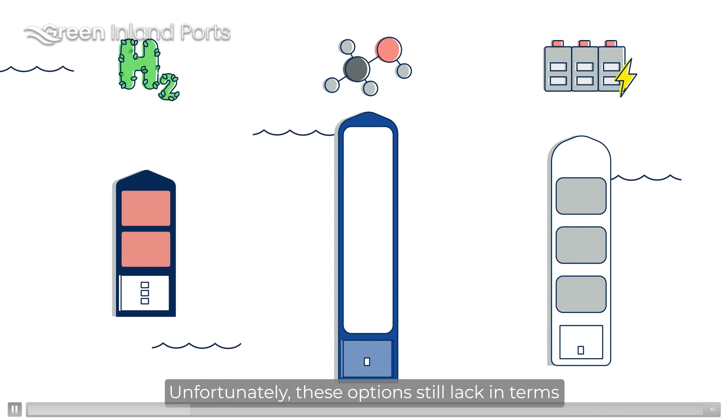The waterborne transport sector faces significant challenges to meet the emission reduction ambitions of the European Green Deal. Synergetics contributes to the sustainability of a large existing fleet of coastal and inland ships, as ships will have to become increasingly clean and use more and more energy with a low or zero carbon intensity. Various solutions are being considered, such as the use of hydrogen, methanol, and swappable battery containers. Unfortunately, these options still lack in terms of costs and practical applicability. Due to the specific navigational routes and diverse types of cargoes they transport, a tailor-made approach is needed to take into account the characteristics of the particular ship and the operation.

To facilitate and accelerate the green transformation of coastal and inland shipping, it is needed to bring together necessary expertise and capabilities. This is where Synergetics will make a difference. The project started in January 2023 and will run until June 2026. Throughout the project, Synergetics expects to have acquired sufficient expertise and skills to provide tailor-made advice to ship owners. Synergetics is made possible by the European Union and is executed by 19 project partners of the following types: research institutes, innovation centers, shipbuilding companies, regulatory authorities, ship owners, and technology suppliers. Due to this unique collaboration, it is possible to accelerate the sustainability of the coastal and inland shipping industry.

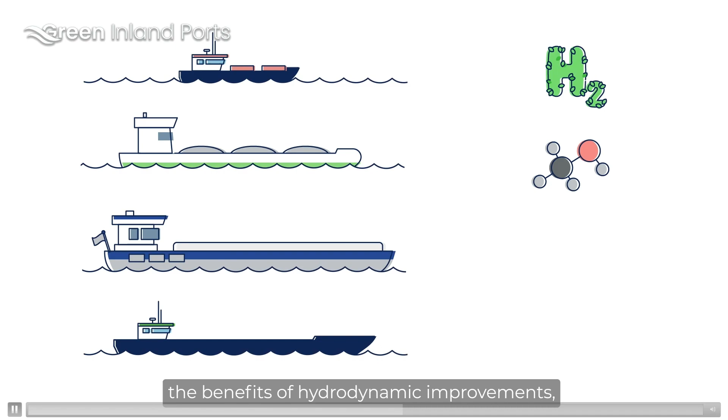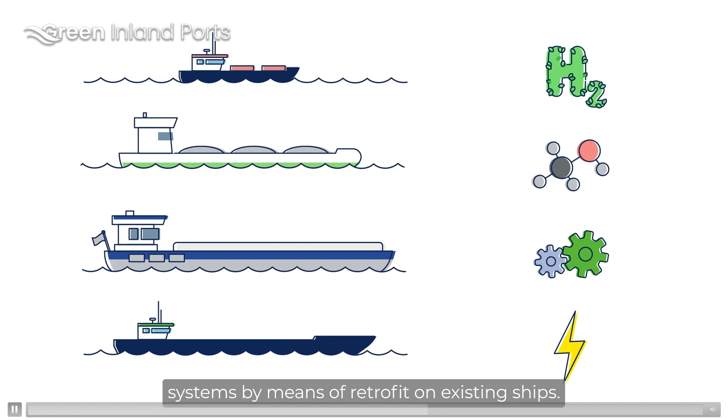Synergetics will demonstrate the use of clean engines running on hydrogen and methanol, the electrification of the main drivetrain, the benefits of hydrodynamic improvements, the use of swappable battery packs, and the improvement of energy management systems by means of retrofit on existing ships. The knowledge how to reduce greenhouse gas and air pollutant emissions is being brought together in Synergetics. The ultimate goals are to create a catalogue of greening solutions, to provide up-to-date scenarios for policymakers, as well as to make available a practical decision support tool and handbook to ship owners for making the right choice for greening of their ships. The project is an innovation action funded by Horizon Europe of the European Union.

The project has a total budget of 7.2 million euro. The European Union contributes 4.2 million euro to the budget. Contributions from the governments of Switzerland and the United Kingdom are also involved. The remaining part is covered by own contributions from the private partners in the project. Synergetics responds to the call, transformation of the existing fleet towards greener operations through retrofitting. It kicked off on the 8th of February 2023 at DST, Development Center for Ship Technology and Transport Systems in Duisburg. An important activity of Synergetics is promotion.

The outcomes will be available to interested parties through different dissemination channels, such as the website, LinkedIn, scientific publications, events, and by means of direct involvement of the stakeholders. Although the most significant developments take place in Western Europe, the outcomes of Synergetics will be disseminated all over Europe, where significant coastal and inland transport exists. Synergetics, creating synergies for green transformation of inland and coastal shipping.

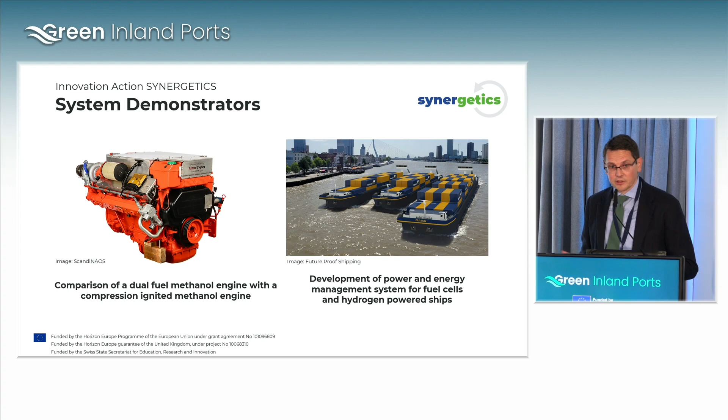And on the other hand, we have Future Proof Shipping, also one of the partners in SYNERGETICS, who is looking into development of the second generation of power management systems for ships which are using hydrogen and fuel cells. They already have the first generation of the systems. They have one vessel, I believe, which is already sailing. The next one is due very soon, and then there will be a third one. And by using the operational data from these vessels, they want to develop a next generation of power management systems. So these are the demonstrators that we are going to deploy throughout SYNERGETICS.

This presentation is called Status and Ambition, so this is the ambition that we were talking about so far. Let's see what's the status, just briefly, because I think I've already stepped over the boundaries.

Robert keeps looking at me.

So I will just quickly go through some of the updates. In this synchronization phase, I think we have one really nice achievement, which is going to be publicly available very soon. We have managed to gather something that we call the pilot database, because people are talking. There are pilots here and there. People are exploring the possibilities, sometimes through their private initiatives, sometimes publicly funded, and so on. But we really don't know what kind of technologies are being tested as pilots. What kind of pilots do we really have? And there was no single database about this. And one of the achievements of SYNERGETICS so far is the pilot database.

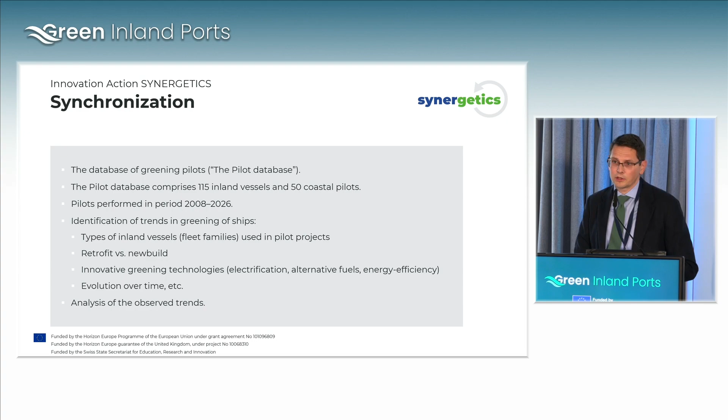We have a database which initially had more than 180 entries. Now we are slimmed down to 115 inland vessels and 50 coastal ships. And it is the most comprehensive and up-to-date database available to our knowledge, and it's going to be publicly available. This is a composition of the types of the vessels. The letters are too small, but it doesn't matter at the moment.

This database is helping us to understand what the trends are. What are the most preferred technologies being used as pilots? What kind of alternative fuels are being used? Are there more electrification or sustainable alternative fuels being used in the pilots? What about the energy efficiency measures? What are the trends with respect to the timeline, and so on?

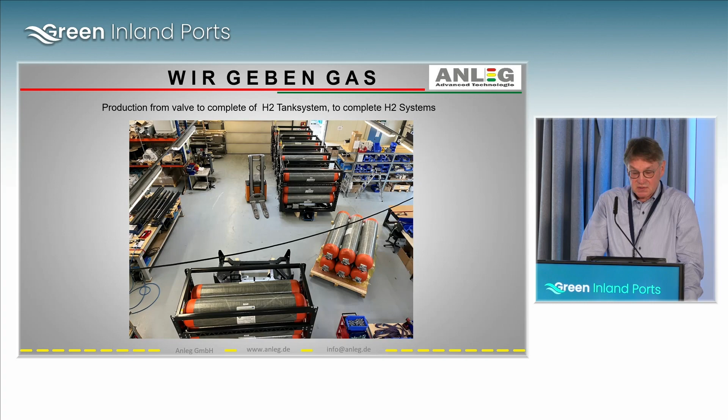So we are transforming all kinds of vehicles. This is for Mercedes. We did the 18-ton just to prove that it's working, and it's not only a one-off. It's one of our rare projects where we not only make prototypes but small series. Next step is 50 units of these 18-ton trucks. As a small company, we are also making refueling stations, because we have an overall approach.

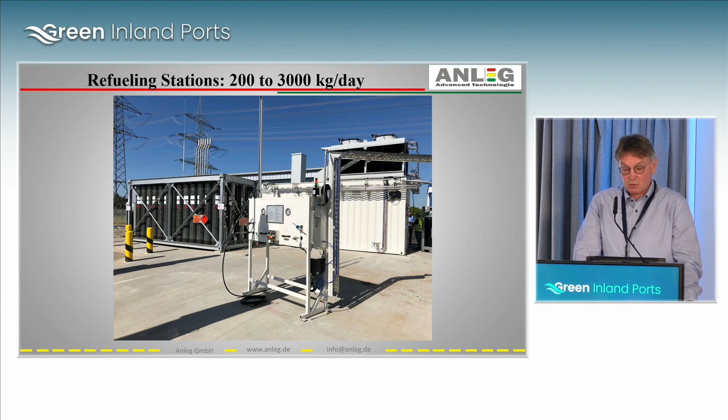The customers are logistics companies. They don't know how a refueling station works, and they for sure don't want to know it, but they need it to refuel their trucks. So we are bringing overall solutions. That means that we make refueling stations. We are also working on electrolyzers, and we have done interesting projects. It has nothing to do with the SYNERGETICS project, but synergy is to use one thing to solve several problems. And the electrolyzer is a very nice example.

We have done a research project with Stadtwerke Kaiserslautern. In Germany, the Stadtwerke own the electricity grid, the wind parks, the water treatment, they run the buses to bring people from A to B, and they run the swimming pools. A swimming pool is an awful hole where you can put a lot of money in, and it will always be too expensive.

So we did a project where we showed that with an electrolyzer, if you use it in an intelligent way, you take green electricity and produce hydrogen. Hydrogen is the byproduct. We produce oxygen to produce ozone for disinfection of the swimming pool. The excess heat of the electrolyzer we use to heat the swimming pool. The rest of the oxygen, not used for ozone production, we use for water treatment, reducing its energy consumption. And then the byproduct, hydrogen, we put into buses.

And suddenly the cost of the hydrogen and the running costs of the hydrogen buses are much lower, because a huge part of the investment of the electrolyzer is used to fill financial holes of other projects. That's quite an interesting approach, which brings us to the consumers of the hydrogen.

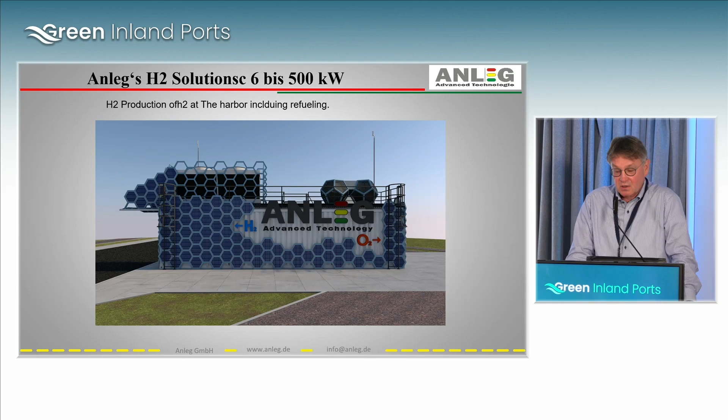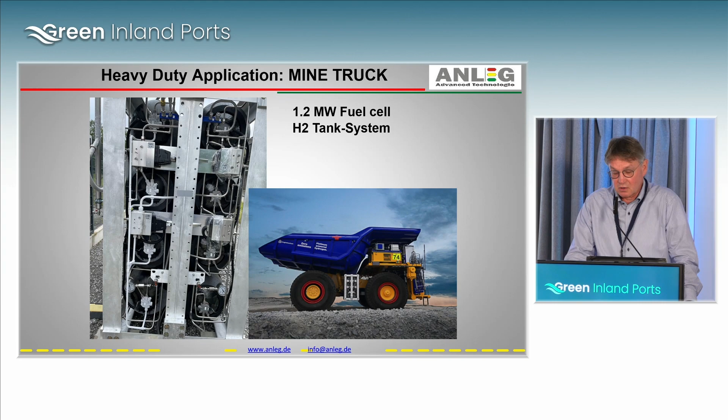We have done interesting projects like a mine truck for South Africa for decarbonized open-air mining, so that's a very ecological thing. It was the first time we implemented 1.2 megawatts into a mobile application. So that was a really interesting project, learning a lot, also about using excess heat to preheat the hydrogen, etc.

And these are all projects we have realized in the last couple of years: a 60-ton truck, a 40-ton Volvo truck, which also ran in Kiruna in low temperature tests. Due to climate change, we didn't have -40, we only had -27, but it fully worked. We have done the MAN trucks, an ICE truck, meaning internal combustion engine truck, and the fuel cell truck. So we can now compare the fuel cell trucks and the ICE truck.

We did the transformation of the battery Crafter because Volkswagen found out that the battery Crafter is not suitable for professional usage, because of 90 kilometers maximum speed. 120 kilometers range; I know from the statistics that no Crafter runs more than 100 kilometers, they are all below. And of course the supplemental weight, if you have a battery Crafter, is not possible.

We transformed it to hydrogen: 127 maximum speed, range is 400 to 450 kilometers at full load. Refueling time 3 minutes, so very easy, but due to a strategic change at Volkswagen, they don't want to produce it anymore because they have a battery strategy, but that's now on the political side.

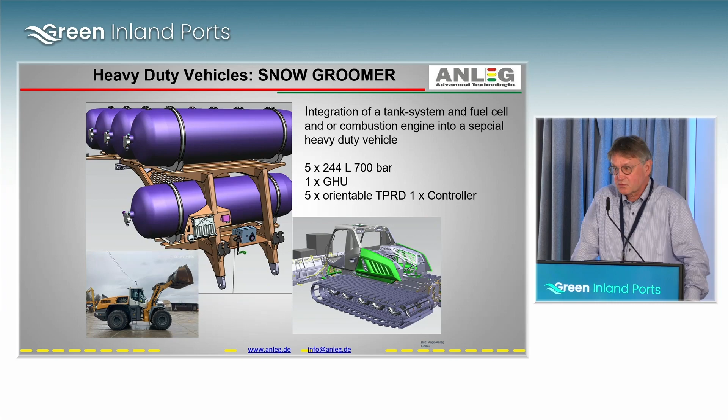And again, 18-ton trucks, which are available, which you can purchase, and we can sell them with the refueling station infrastructure. We also converted a snow groomer, decarbonized skiing in the Dolomites with an Italian company, Prinoth. It's an interesting project for us because then we learn off-road applications. We are also making a refueling station for this snow groomer, so it can be refueled. It's just experience.

And then we come to the next problem. Very often, and especially in harbors, you have vehicles which are not so suitable to go to the refueling station. So we developed, the first one was in 2014, a mobile refueling station. That means that the vehicle is not coming to the refueling station, but the refueling station is coming to the vehicle, allowing me to have several spots where I refuel my consumers.

And this is the one I went to Sweden with to do the first refuelings of the 40-ton trucks and the 60-ton truck from Volvo, and we are currently building a bigger truck for refueling with 500 kilograms for a maritime application in the south of France. So with one truck we can refuel several harbors, which are Nice, Cannes, Monaco, up to Marseille, Toulon, and that's what we're currently building.

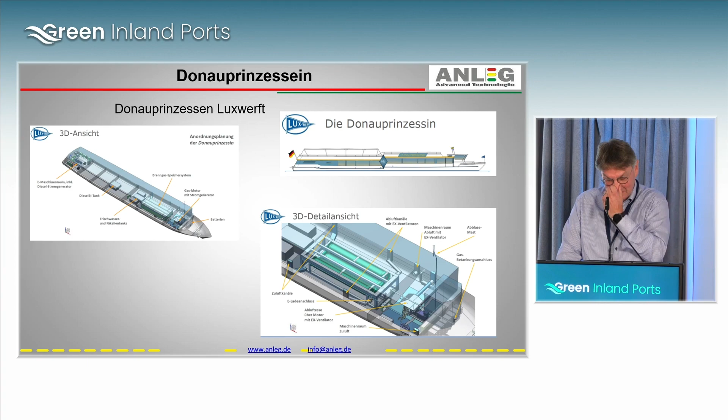That's a Donau project. We are very proud. We are waiting for the fundings, which is something quite usual in Germany. It's the Donau Prinzessin. It's a passenger boat similar to what we used yesterday, and we passed through the certification. So now we are waiting for the funding to realize this project.

One of my first push boats was the Elektra push boat, which is running in Berlin with a 300 kilowatt fuel cell system, battery pack, and hydrogen. That's where I first had the idea to develop so-called H2 tank containers or cartridges. That means that I bring the bunkering process away from the harbor to the inland, and I just have logistics.

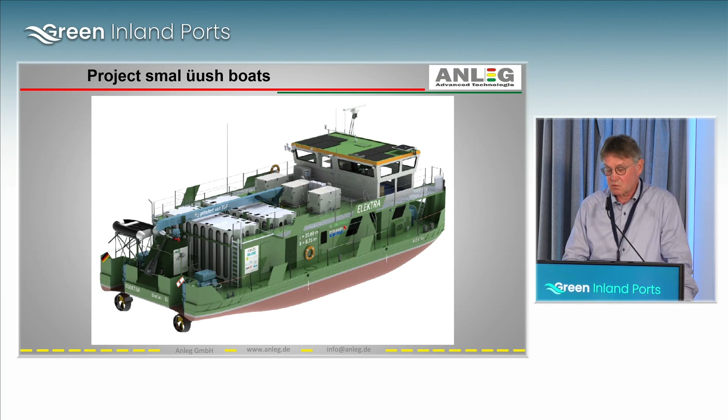And containers, as you see when you look out of the windows, are something used in ports. So I don't need a refueling station at the harbor. I don't have a bunkering process. I just swap containers, which is quite easy, quite quick, and works quite fine. So we implemented it and showed that it works on the Elektra push boat.

We have the hydrogen boat for the harbor passenger taxi boats ready. We're just waiting for hydrogen infrastructure to transform these boats with a similar principle to fuel cell. For regulation, you need, of course, two systems, so if one shuts down, you can run the other one. And hydrogen supply. I'm just showing you examples which are possible today. We can start with this kind of boats. We can start offshore working ships for offshore wind park platforms.

We passed through DNV and CESNI, and that's interesting for me: as an engineering company which wants to produce things, we suddenly became specialists in certification, regulations and normalization. So we are also mandated by a few Rhine shippers to work together with the DST to work out regulations, or how hydrogen systems could be implemented on different kinds of ships, meaning cargo, container, gas carrier. Where can I place the hydrogen system so that it gets classified and certified by regulations?

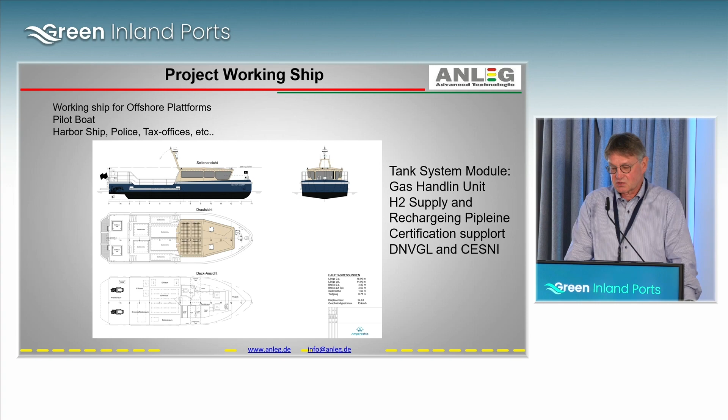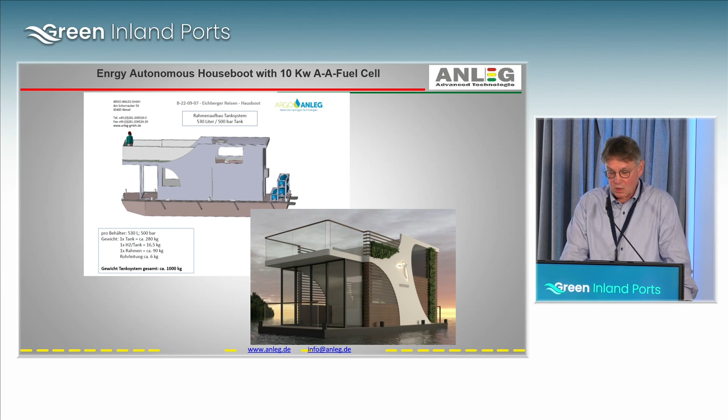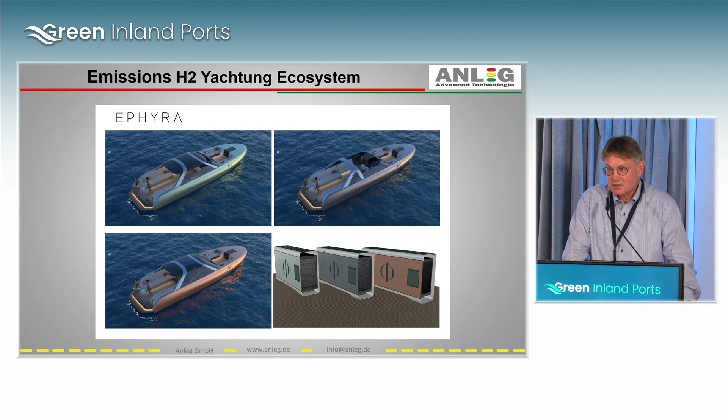Other applications like houseboats, a very interesting project. It's more a demonstrator, but decarbonized tourism is coming more and more. And we also have luxury leisure boats. You know, more and more people want to have nice fun with a boat. A 40-foot full carbon boat, high speed with a hydrogen system, with an ecosystem, so the hydrogen is produced on site, and during the night the boats are refueled.

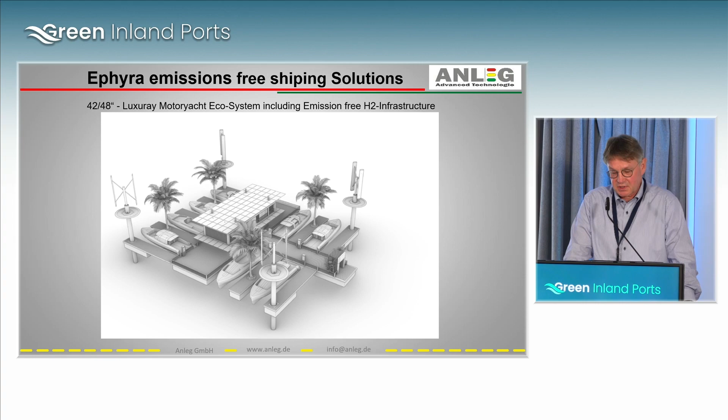In Mediterranean regions, 80% or 90% of the boats always sleep at the same harbor, so you only need one infrastructure to refuel these boats. We built one 2 years ago, and we are now building 4 for the Olympic Games in Paris. A 90-foot catamaran, also for passenger transportation, we are currently realizing. And now, coming to what interests you more, we are currently building the Rhenus Mannheim with 800 kilowatts of fuel cell.

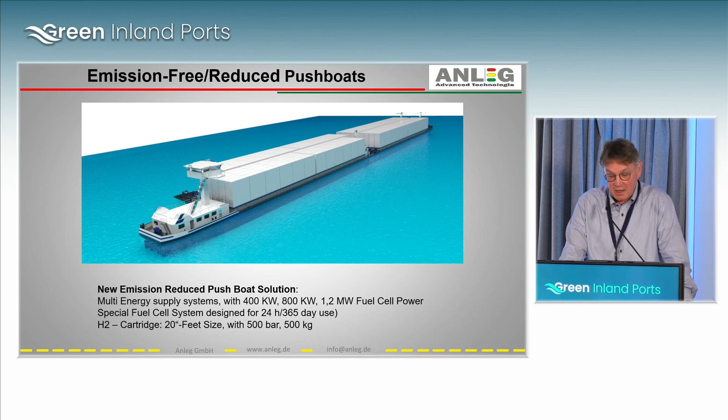And here we applied the same system. Oh no, it's on the next slide, sorry, this is the hydrogen supply. To make it easy, we made 20-foot containers, which can be swapped off the vessel. And the fuel cells are in this open space compartment. That's because of regulations; that makes life easier. And this ship will start to sail in January.

So today it is possible to transform these ships. And we are currently planning the next ship, which will run end of '24, beginning of '25. It's a 1.2 megawatt container push boat, which will also run on the Rhine between Rotterdam and Duisburg. And that's our specialty. We do the full package, from the hydrogen tanktainer to the gas system to the implementation of the fuel cells, everything from one hand. And on this project, we also look at the hydrogen supply.

And that's now the interesting point: if you have this kind of user, the push boat Rhenus Mannheim will need approximately 2 tons of hydrogen every 100 hours. So with the tanktainer, which I have to bring to the harbor, I have a big consumer of hydrogen. So with the investment in an electrolyzer, you are not investing in a small one, you invest in a big one. So the economy of scale is there.

And we can produce hydrogen today, purchasing the electricity at 10 cents per kilowatt-hour, which is still quite expensive. We can produce hydrogen for €6.50. €6.50 corresponds to the energy costs of running the ship with diesel. So if we are at €6.50 today, we can run a fuel cell ship cheaper, and we can also run an 80-ton truck cheaper on hydrogen than on diesel. And now that's the interesting point. So the economics works today.

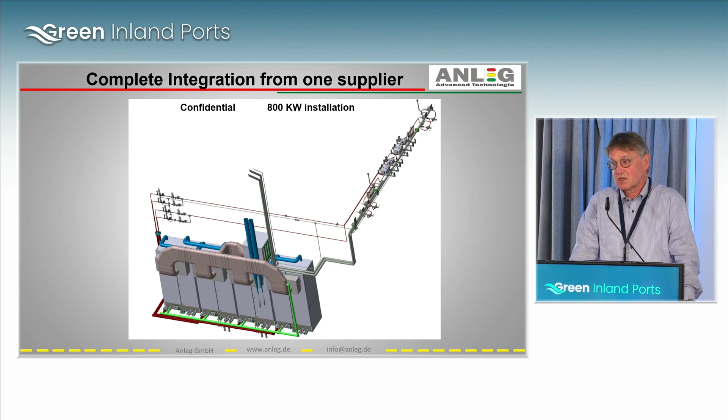That's very, very important. And now, for the hydrogen tanktainer we designed for the ships, there's another business case, because the ship is on the water 100 or 120 hours between Rotterdam and Duisburg, as an example. So it needs a minimum of 2 sets of tanktainers, because one set is on the ship and one is on land at the refueling station being refueled. The refueling time is 2 or 3 hours, so that's nothing.

And with this tanktainer at the harbor, I can build up a very cheap refueling infrastructure for the vehicles or applications I'm using at the harbor. While the ship is sailing from one point to the other, I use this hydrogen supply system for the ships to refuel my trucks, my forklifts, my electrical generators, or whatever else. And when the ship is coming, then I organize, and that's only logistics, and harbors can do that.

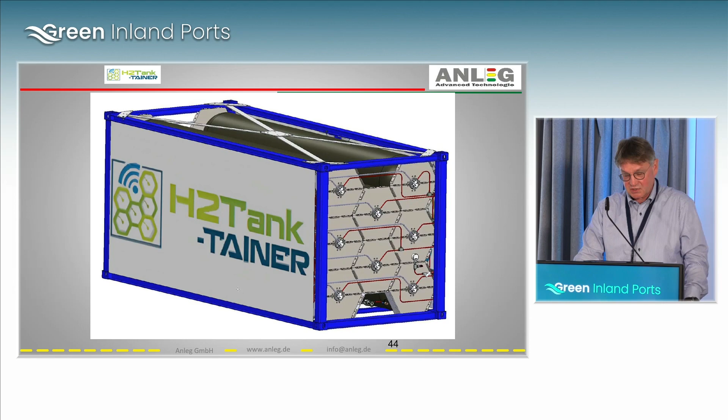I organize a full set at the quayside, put it on the ship, take the empty one, bring it back to the refueling station, and then here we go again. And then I also share the investment of one expensive tanktainer by using it for several applications. Here I have the example of a low-cost dispenser where I don't need compressors.

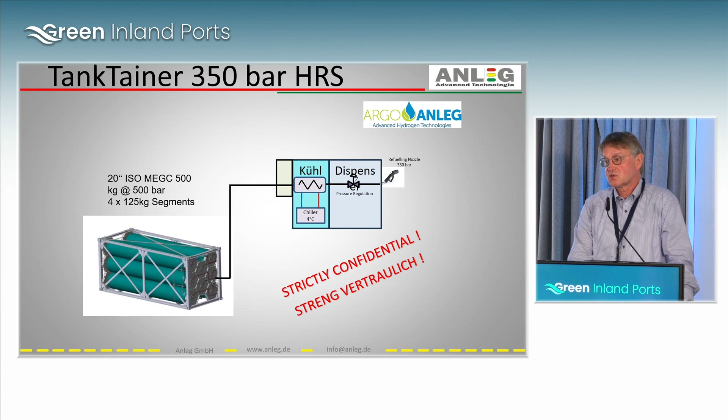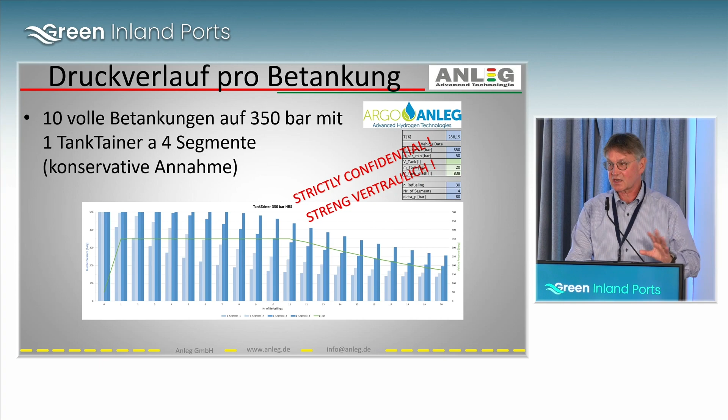Depending on the pressure rate, I eventually need a chiller, but I can make a very cheap infrastructure for refueling different applications. And I just calculated an example: I can refuel 10 vehicles at 350 bars using all the 4 segments. That's technical details now. So it's technically absolutely feasible and makeable.

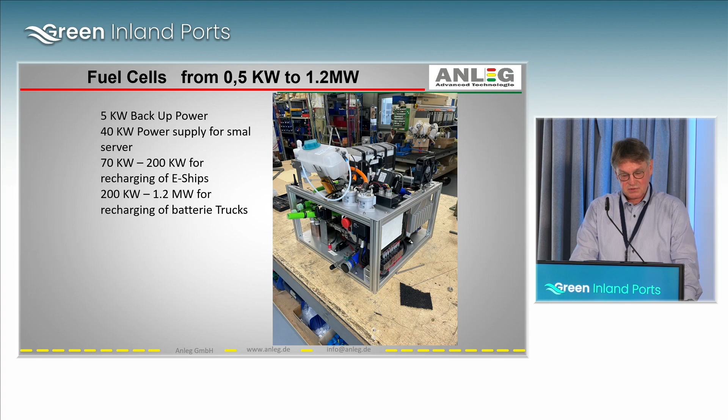And now for harbor applications, we also make hydrogen generators, electrical generators, for example, for recharging ships during the night or supplying the electricity of the ships during the night. So that's fuel cell systems, and I just made it in time.

Questions? I think we leave the questions for the end because we need to run a little bit. Thank you very much.

I think we've seen quite a lot here. One of the synergies that we wanted to establish is to learn from the other industries, because shipping is an ancient industry, and it's also very inertial, so to say, and other industries are very often more advanced, and this is what we can learn from them. But there is more to this, and I hope we will have some time for the discussion.

Our next technology in line is methanol. Bengt from ScandiNAOS is a pioneer. He's actually the first person that I have heard talking about methanol on ships. Maybe it's me, but okay. Bengt, please. The floor is yours.

Right. Speed up. So, yes, good morning. And thank you, Igor, for the introduction. I will try to do this as fast as I can.

My name is Bengt Ramne. I'm managing director of ScandiNAOS AB. We are originally a naval architectural company based in Gothenburg, Sweden, but we have some presence on the continent as well, with ship and boat design in Trieste, Barcelona and Split. We were established in 2005.

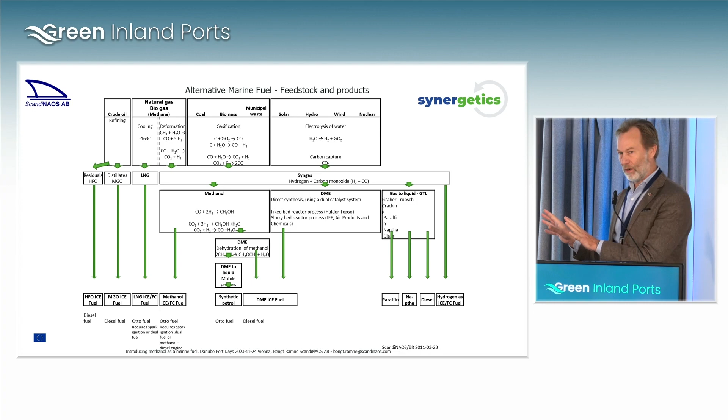So we did an extensive mapping of what fuels were available, starting with the existing fuels based on oil. In 2009, when this happened, everyone was pushing LNG. We thought gas was good, but it has a problem on ships, so we were looking for other ways. We don't have to go through this, but this analysis ended up with methanol. We thought that methanol is a good thing to look for.

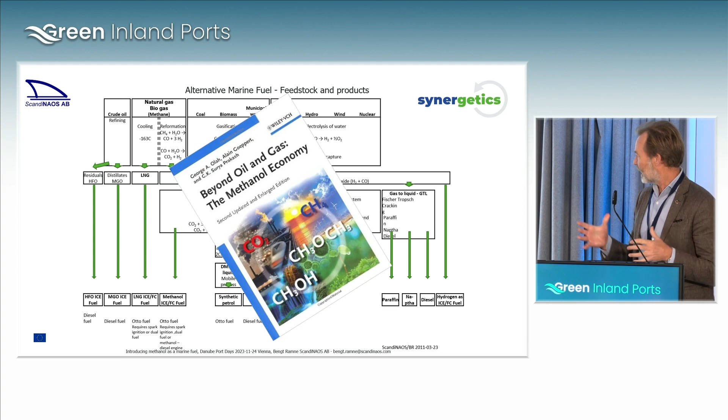We were not the first one. Some great minds had already considered methanol as an alternative fuel to oil. George Olah is a Nobel Prize winner. We got some inspiration, and we took his thoughts.

Why methanol then? It's a clean burning alcohol with no sulfur and low emissions of particulates and nitrogen oxides. It has a good potential for being produced from renewable feedstock. It's biodegradable and does not bioaccumulate in the aquatic environment. It's a liquid, which is important when you need to carry a lot of energy. And it's easy to transport. It's liquid in normal conditions. Those are important things for us.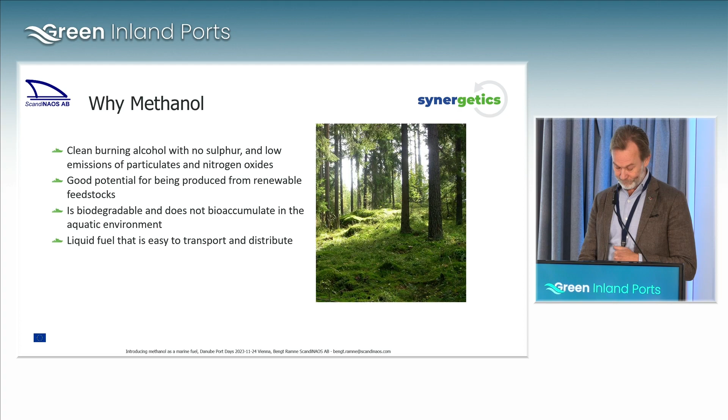Again, this EffShip project was the ground zero. We did this project together with Stena, Wärtsilä, SSPA, and a number of other companies. We pitched the idea, we identified the benefit of methanol, and we got Stena to consider it a good idea. So we got them to support a number of pilot projects.

The first was Stena Scanrail, and after that we did the Stena Germanica conversion, where we converted the second largest Ropax vessel in the world to methanol. Four Wärtsilä engines were converted to methanol. We were acting as the naval architects and system integrators, so we did everything except the engines, which were done by Wärtsilä. But we developed the design and all the systems around it.

About the same time, the Mari Jone was also built. That's a product tanker with a 2-stroke engine delivered by MAN. So at that time, things were really happening. We were really getting going with methanol, at least in seagoing shipping.

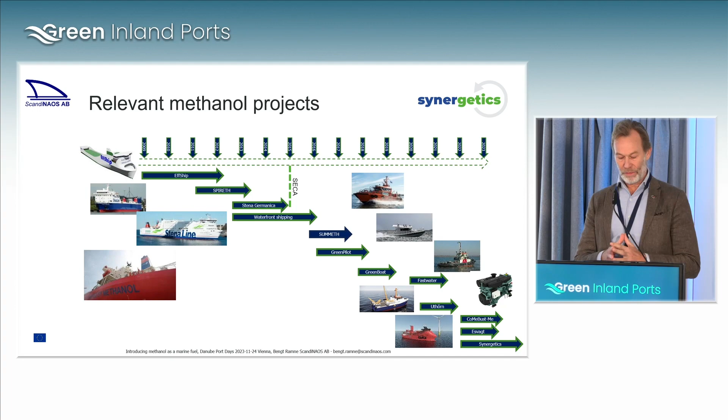Then, as a challenge as a naval architect, when you introduce something new on a ship, you have to convince everyone you take care of the risks. One concern with methanol, it's a low flash point fuel. It's 11 degrees, and typically for ship fuels, it has to be 60 degrees in order to fit into the regulations, which meant that there are some considerations you have to do, and of course, you have also to prove that what you're doing is right.

At the time, when we started this, there were no rules for methanol, which someone thought was a problem. We thought it was a benefit, because then, well, we set the rules, but you always have to convince clients, authorities, and class that you're doing safe things.

So apart from the low flash point, there are some other concerns. Methanol, when it burns, it's clean burning, which is good, but it's so clean burning you don't actually see it when it burns. So you have to be aware of that, so you have to have other ways to detect if you have a fire. And there are different ways to approach fire suppression. It burns in a different way. It's not always a worse way, but you have to just be aware of the situation.

And then we have the issue with material compatibility. It's corrosive for some materials, and for polymers like gaskets, sealings, what works with diesel might not work with alcohol. But that's just general engineering work to do. You have to go through it.

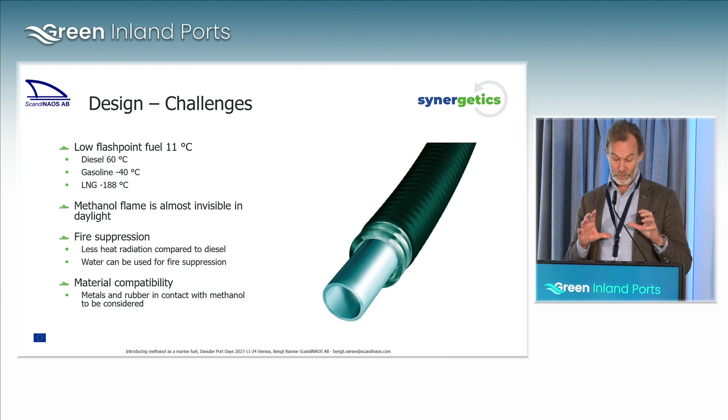So that was things taken care of, and that's then the Stena Germanica, where we then adopted this new knowledge we had. And changing from diesel to methanol, you can make it very complicated, it becomes very expensive. But if you do it carefully and you really identify the risk and try to be clever, it's not that big deal. You can actually make a conversion of a ship within reasonable cost, and particularly much cheaper than any other alternative fuels. Stena Germanica, 4-stroke engines delivered by Wärtsilä for the big ships. Mari Jone, 2-stroke engine delivered by MAN.

So with those 2 projects, we have got the ships, we have got the methanol on to the marine market. And that was somewhere between 2013-14. So it's not a new thing. It's pretty well established, even though we haven't really seen the big boom yet. But there is no excuse for anyone to say that technology is not there. We have a system, we have the methanol.

Anyway, we were moving on from there. We said, well, now this is done. Let's look for the smaller applications. So we got a project together with Swedish Maritime Administration, where we got to equip this pilot boat with a methanol engine. And we were assuming that we would do the same thing as we did before, naval architects, system integration. And we asked Volvo, Scania about the methanol engine, because we said, you must jump on this opportunity. But there is no real drive from the big engine manufacturers to do anything different.

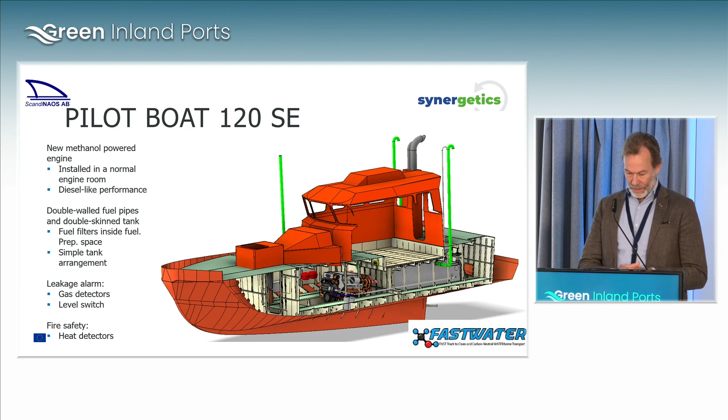But we realize we can do it for the Scania type engine. We can make this compression ignited. It's good. I think that's the best engine we can see, but it's limited. So now we are looking to broaden the offer. So then we see that we have to approach a larger market, and that's why we now have introduced this

dual fuel system. And all engine suppliers, they will say that they will have dual fuel systems in 2027, 2028, and they will have it for their particular engine. We say we will have a dual fuel system operating in 2024, and it's a generic system that you can apply to pretty much any engine. And that sort of stirs up some activities and makes OEM engine suppliers a bit nervous, which is, I think, good.

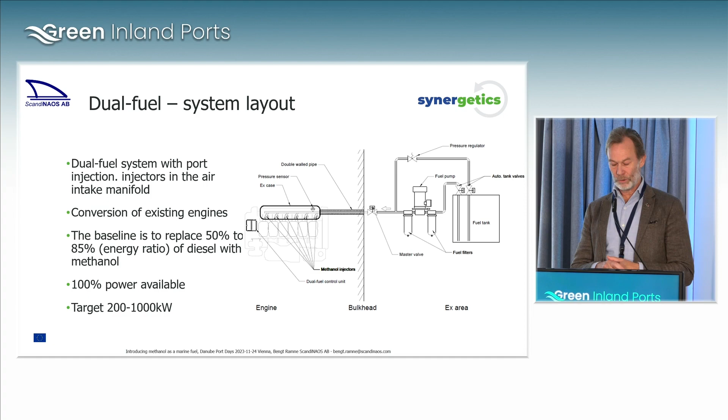A dual fuel system, we maintain the original diesel system. We add a methanol fuel tank, a pump, a filter, some valves, and then to the air inlet manifold, we add methanol injectors, and then we add our control system. This is now being adopted onto Volvo Penta engines and will be fitted into a pilot boat by the end of this year, and then this will be tested for the Volvo Penta.

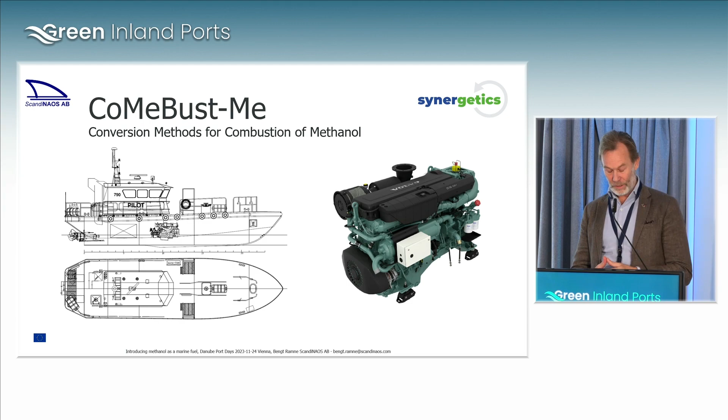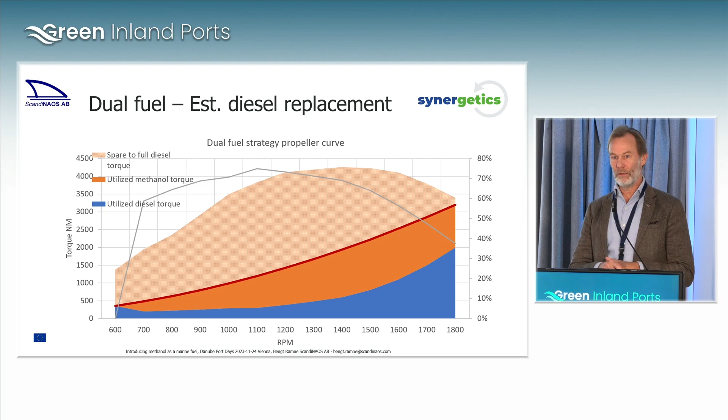But the important thing here is that we find a way to convert existing engines. So if you have a Cummins, an MTU, or an MAN engine, we can convert that engine to methanol, which means that all existing fleets are now a target for our conversions. Anyway, in the SYNERGETICS project, we will have two engines. We will compare the compression ignited toe-to-toe with a dual fuel. So we will see how it performs, cost of the engine conversion, fuel efficiency, emission, etc.

And of course, the objective is to find how to convert the existing fleets, or replace existing engines, in the most cost-efficient way. For new building, or where you need to re-engine, and within the engine power range, we would say that the compression ignited engine is preferred, but for any other engines, the dual fuel concept is what we think is good. So this is the engine for the SYNERGETICS project,

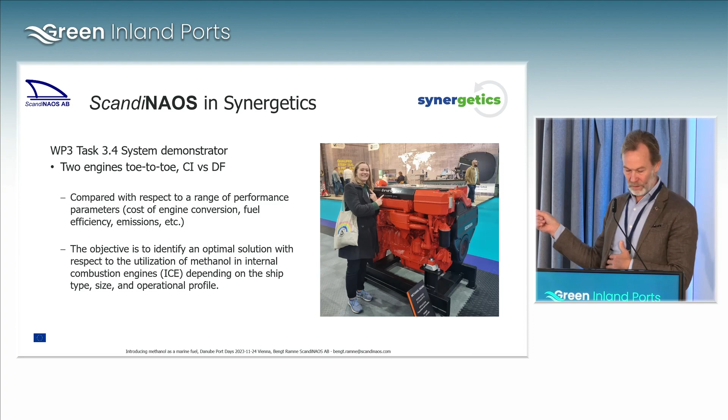and we are operating two entities: ScandiNAOS design and development, and then we have Enmar Engines, which is our engine entity that delivers engines. Enmar stands for Environmental Marine Engines, and you can understand how surprised I got when I realized Enmar is Ramne read backwards.

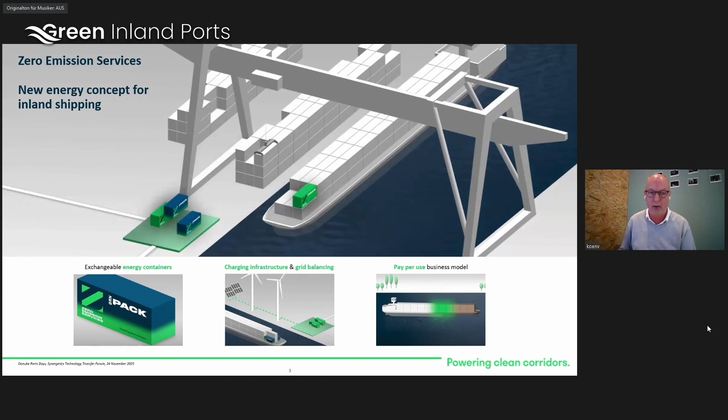And the current ship is called the Alphenaar, and it's a relatively small ship, 90 meters, with about 100 TEU on board, shipping daily from a small town called Alphen aan den Rijn to Moerdijk, one of our large coastal and inland shipping ports. So back and forth every day, which is about 60 kilometers, so 120 kilometers. And with one battery container, you can do this 60 kilometers.

Currently there's only a docking station in Alphen aan den Rijn, so you need 2 battery containers aboard to go back and forth. If there is a docking station in the other part, and we are in the process of achieving that, then you swap one of these ZESpacks, one of these modular energy containers, and that's basically the system.

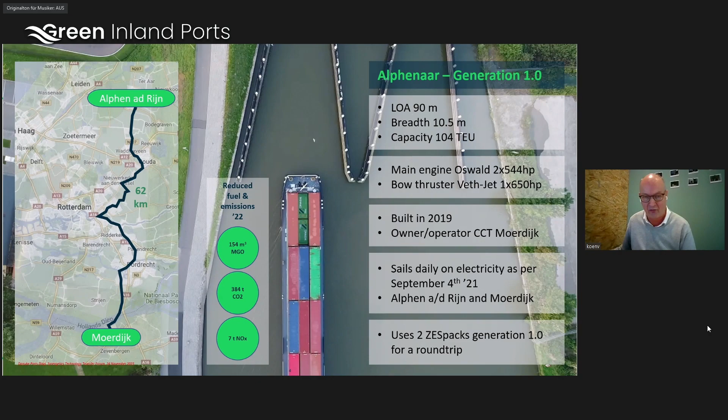Here's some pictures. A docking station has a very small spatial footprint, about 15 by 20 meters. This is one of the containers, which is a 20 foot. This is the port of Alphen, the small port near the huge brewery of Heineken. So most of these containers are filled with beer at the moment. And this is the ship called the Alphenaar. And this is also kind of the rivers where it's going through.

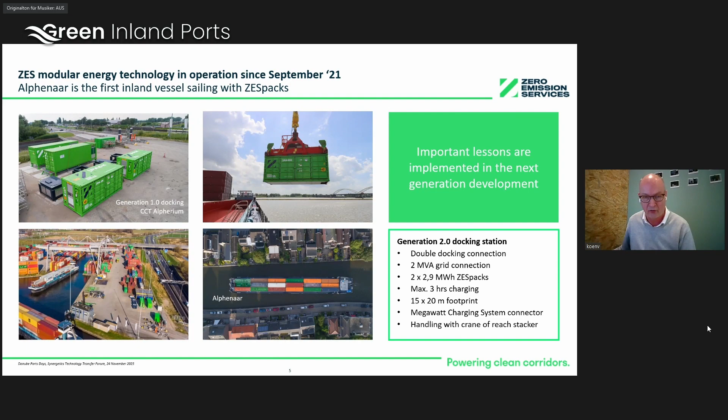And one of the huge advantages is also the lack of noise. You can imagine that these people are quite happy that this ship is now almost silently crossing the waters. There are some learnings which will be part of SYNERGETICS. And we see a lot of adjacent models where you can improve this system.

If you have a direct line to docking stations from a nearby distribution center, of which there are a lot in Holland, probably also in Austria, you can use the solar cells to load the batteries as well. So you have a direct line, and you don't have to buy green electricity. Shore power might be, we are looking for a flexible shore power solution using containers for that.

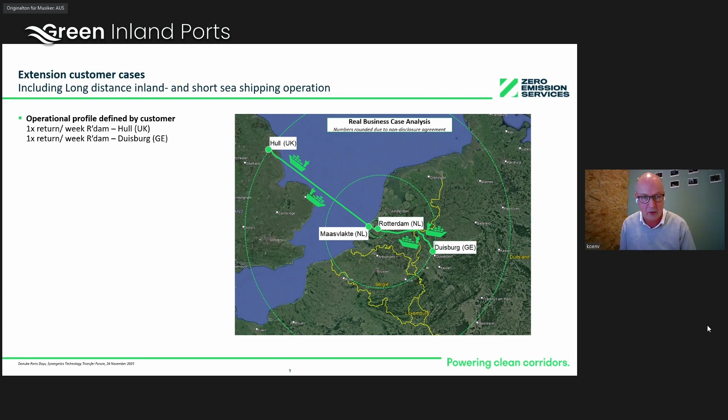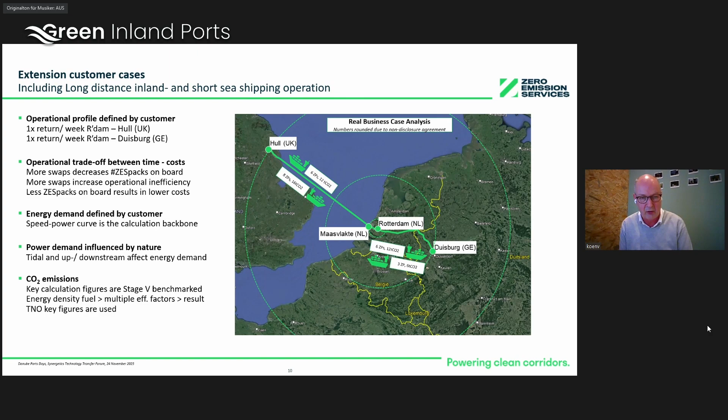So we are now actively involved with a shipment from an inland port in Holland called Nijmegen via Rotterdam to Hull, back and forth. And we are looking for solutions along the Rhine to Duisburg or Wesel. It's always an operational trade-off between time and costs, as you can imagine. We really need to look into every case in detail, what exactly the energy demand is, and of course what the power demand is at certain locations.

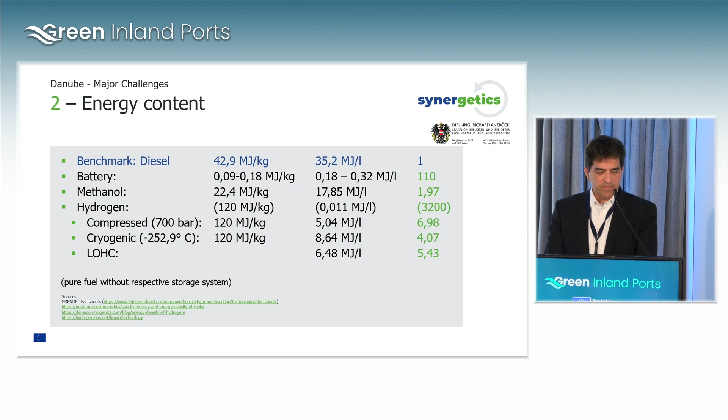If you look at the infrastructure, you have the Rhine. It's densely populated, a highly industrialized area along the entire river. You have a lot of chemical industries along the Rhine, which make the availability of alternative fuels quite probable, and also the reliability of this availability, even, as we heard, as byproducts of something you are doing anyway. Short distances between bunkering stations are possible. On the Danube, in comparison, there is a lot of space in between. You have hardly any chemical industry along the river, so hardly any synergies. Anyway, you need sufficiently narrow spacing of bunkering stations, which would be difficult to achieve along the Danube.

A general consideration is that a transition from a single fuel environment, diesel, to a multi-fuel environment, methanol, hydrogen, batteries, requires a multiplication of bunkering and storage facilities. So there is, as we already heard, not a one-size-fits-all solution.

For the costs, I have just gathered some anecdotal evidence. Batteries for long-distance transport, evidently there is currently no use case. It's just for illustration. In order to replace the average bunkering capacity of a typical Danube pusher, which is about 60 tons of diesel fuel, you would need batteries with a weight of about 1,500 tons. And according to current key information, a total volume of 750 cubic meters, which is about one barge,

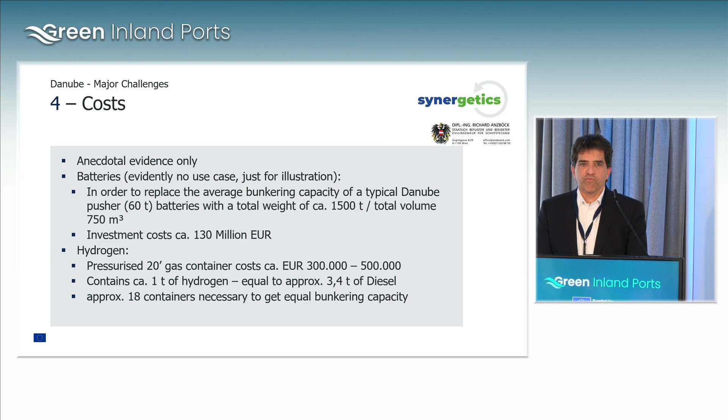and an investment cost of about 130 million euro. For hydrogen, if you go for pressurized 20-foot gas containers, the costs, perhaps Jan will correct me here, is about 300 to 500,000 euros. It contains about 1 ton of hydrogen, which is equal to approximately 3.4 tons of diesel. So to get the same bunkering capacity, you would need approximately 18 containers. So what I want to say with that is, if you go for these alternatives, you really need a very dense spacing of bunkering or swapping facilities for these containers.

What could we do? Batteries, probably suitable for local passenger traffic, day cruises, where you also have an influence on the available infrastructure. Methanol, hydrogen is first of all a hen and egg problem with regard to the infrastructure, because ship owners will not invest as long as there is no sufficient bunkering infrastructure, and bunkering companies will not invest as long as there are not enough vessels using alternative fuels. So again, if you're a shipping company that has a certain influence on the infrastructure, it might be a viable alternative. So if you can set up your own bunkering infrastructure because you have a point-to-point relation, it might be possible.

Then there are further challenges. We have heard from, in particular, Jan and Bengt, many of these challenges. There are already solutions. There are approaches to mitigate the potential dangers. For example, methanol is toxic. It mixes with water, can be a hazard to persons and the environment. Hydrogen, for example, in its cryogenic form is extremely cold. It's close to absolute zero. So it could be, in case of inadvertent spillage, a hazard to the structural integrity of the vessel in case of spontaneous embrittlement. And of course, we have the issue of crew qualification. You need highly qualified crew to appropriately use these alternative fuels.

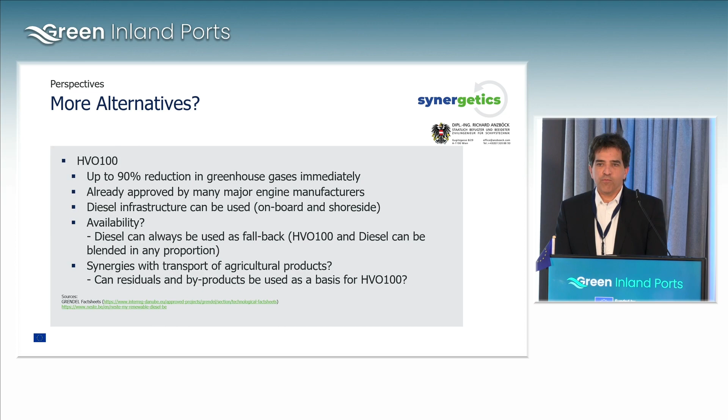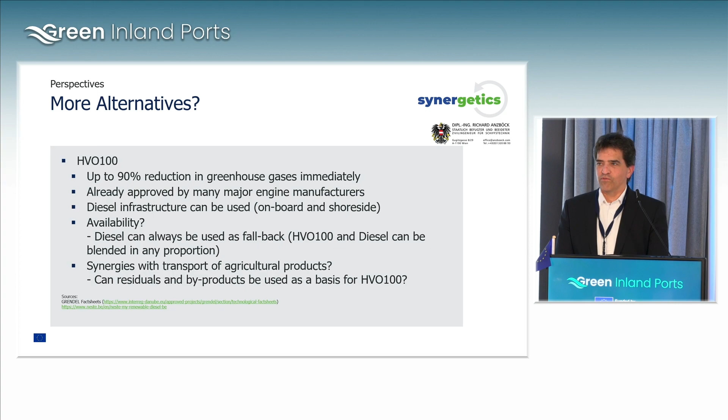Could there perhaps also be synergies with the transport of agricultural products, which is quite some commodity on the Danube? Can residuals and byproducts be used as a basis for HVO100 and create their own business case in that respect? So you see there are still lots of challenges for the use of alternative fuels. I'm, as I said, as an engineer, very enthusiastic about all those technological developments. But if a customer asks me today, I would say, go for it, grab a contract with someone who can supply HVO100 for you, and then take your time to think what you really want to do in future. Thank you very much.

Okay, so shall we bring the... Good. Yeah. So, may I ask, what do I do? Yeah, okay, good.